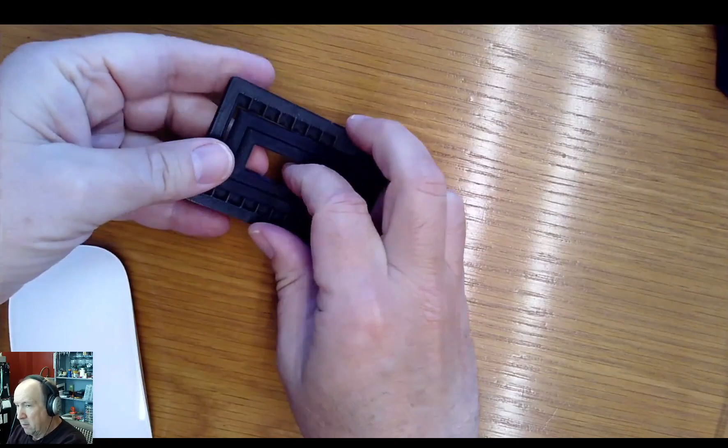This is a cell phone holder. You basically set it up like this, and then you can set your phone in. Works really well.

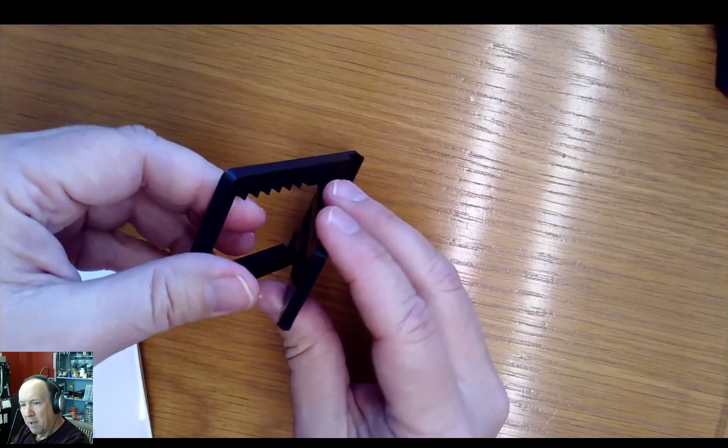Now, when I saw this, the thing that fascinated me by it was it printed in one piece. It prints just like this, but when you take it apart, off the print bed, it's got hinges. And I'm like, that could be really useful. I was fascinated by that.

Now, this came off of a website called Thingiverse. They got lots of stuff out there, I've talked about them before. So I went and looked at the files for this, and it was actually done with OpenSCAD. And what they do to make this work is they do

kind of a 45-degree pin and socket. So in here, this part has a pin that sticks out like this, and this part over here has a socket that's the same shape. But they're about 0.6 millimeters apart.

And, you know, it kind of seems to violate our rule that we can't print in midair, but it really doesn't. There's 3 parts here, and all 3 parts are flat against the build plate. We can actually print overhangs of about 45 degrees. So if I make this pin that sticks out at about a 45-degree angle and I make the socket about a 45-degree angle, that'll work.

So what I did was I sat down and worked it out, just like we did the servo. You can make modules that do this type of thing for you so you don't have to work it out all the time. And instead of you trying to figure out all that stuff, it takes a lot of prints, and since I got a printer behind me, that wasn't a big deal. But trying to get you to do that, it's a day or two between turnarounds, and that makes things too slow.

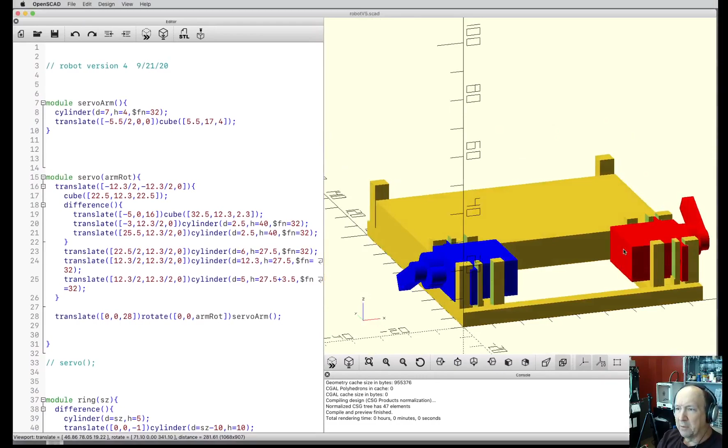I'm going to turn this off for a moment, and then I want the same thing. Let me save this as the next version. Save as. This is going to be 6. I will push these files up to the file section. Okay, so we're back to nothing.

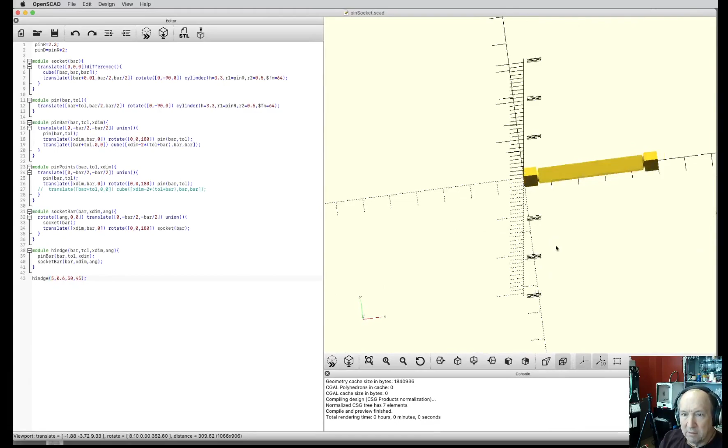Okay, fine, let's see. I want, let's see here. Okay, I want this stuff. Now, I've got this library pre-done, and it actually looks like this. But I've got a module stuck in it right now, and I don't really want that in here. Let me get rid of this. This is what it looks like. And the code is too small, so let me make that bigger.

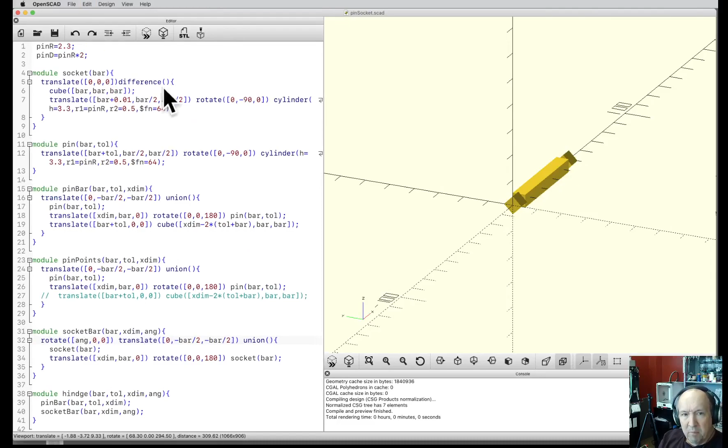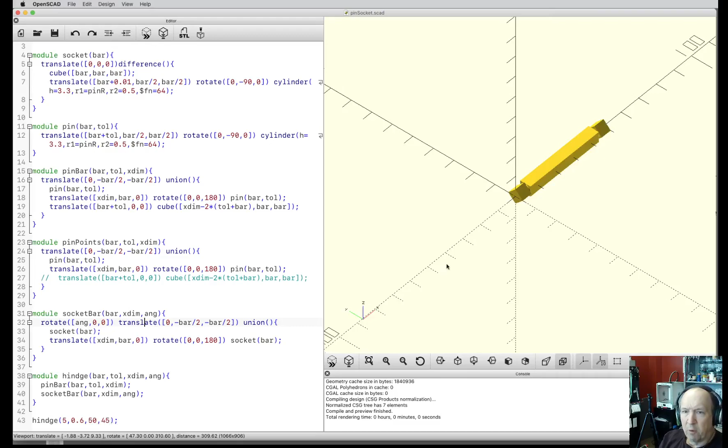So this is the design that has... you could barely see it in here. This is the pin, and then this cube over here has the socket on it. You know, I can make it easier to see. I can do a difference.

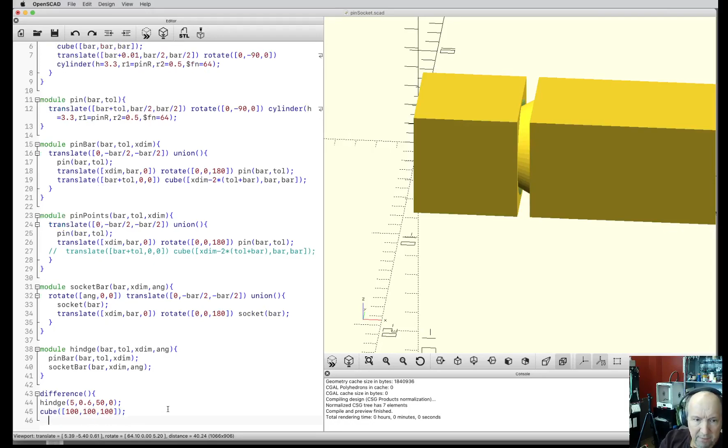Put in the hinge, and then take out a cube. I'm going to make it big, I'm just going to make it, and it'll probably just make everything go away. I need to close that difference. Nope, it did exactly what I wanted to do - it took out part of it. So I subtracted off things, so now we can see how this thing works.

In fact, if I translate it, it's centered, so if I translate it down, I should be able to get the whole thing cleared. Translate 0, 0, minus 10 is enough. I can't spell.

Commas, not decimal points. Okay.

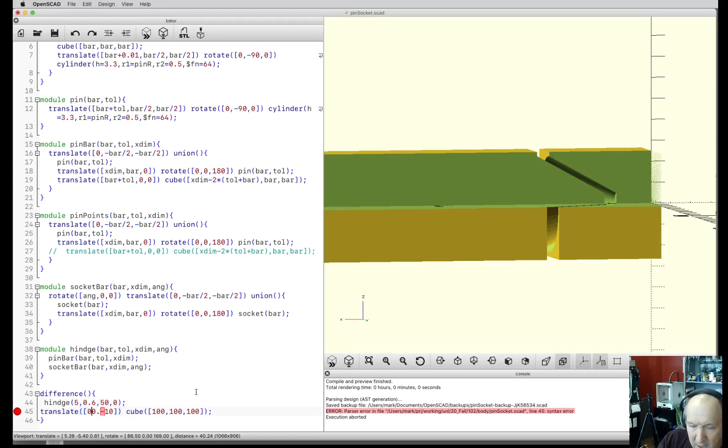Okay, so cutting away half so we can just see what's inside it. What we can see here is these parts don't really touch, which is fine. That's really what I want. But when I go to print this, I can actually make it do something that we normally don't see.

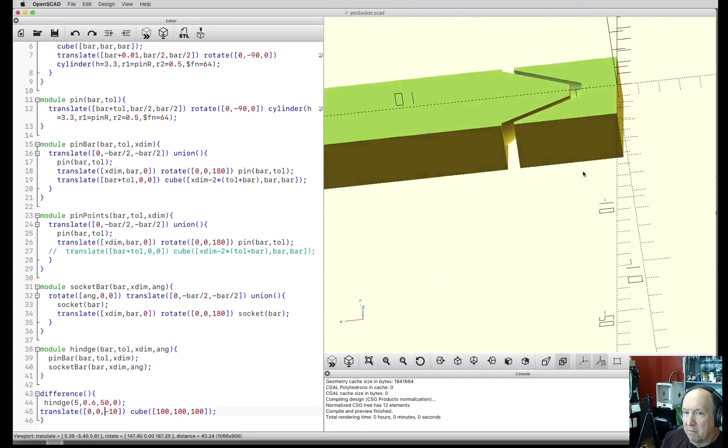So this was what's going on inside. Okay, so now I can just copy all of this code and stick it in our robot, but I've got it in the same directory, so it's called pin socket.

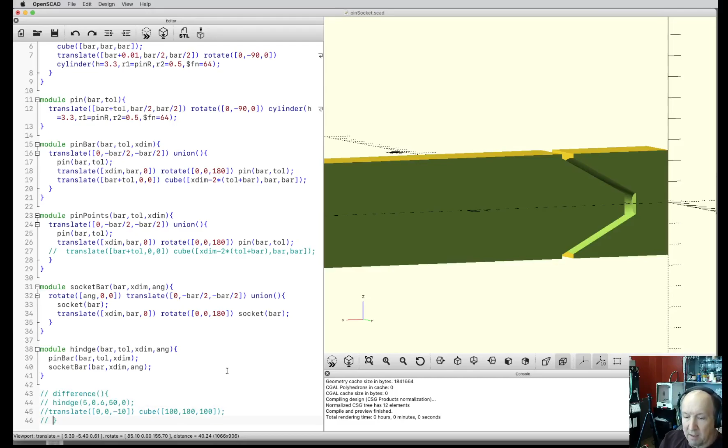So let me do something else here. Let me just comment this out, so there is nothing that's going to be drawn. There's nothing. There's a bunch of modules defined, but it doesn't actually call any of them.

So now let me save this and set this off to the side for the moment. And then clear back at the beginning of mine. Now this is version 6, and this today is the 30th.

I can say, instead of putting all the stuff from the other file in there, I can just say include, and I can tell it what file to include. This is called pin socket.

So if I do something I use a bunch, I don't have to keep copying and pasting it in, because then if I make a minor change to it or something like that, then which one's got the current version and stuff. So this pin socket routine actually just goes in for me, and it makes it much easier.

Now, I don't call anything out of that yet, but whenever the program goes through and looks at this for our robot and tries to draw something, it actually includes that entire file.

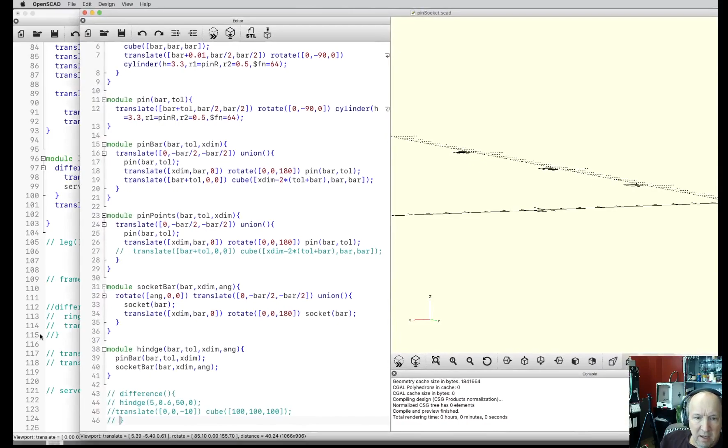So now if I go to the bottom here, I can include that thing that we did earlier, that hinge function. Remember, so I can come up here to this, and I just want this piece. I can just copy that out, go back to this is our code, and I can just drop this in here.

And now when I say draw, there it is. That just keeps our code really clean, makes it much easier to deal with.

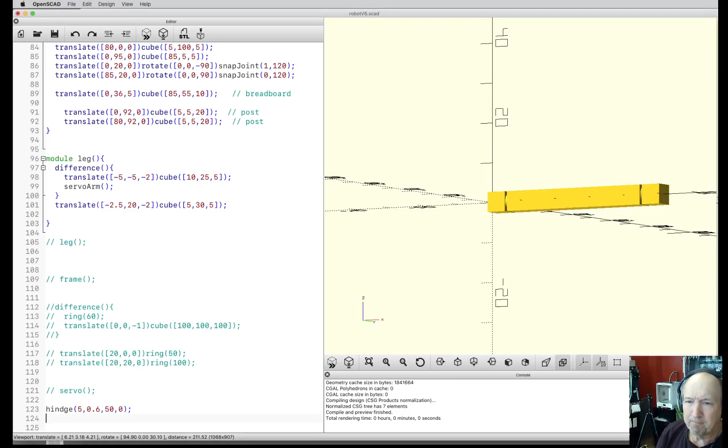Okay, so now how do I make this do something that I want? Well, getting carried away with this is really easy.

I did another project a while ago. Let me flip back to the document camera. And this never got all the way to completion, but it just gives you an example of all the bits and pieces of things that you can do.

Now, the other thing that we've got in here that we haven't really covered is the ball joints. And we'll cover those in just a moment here.

But so now when the servo moves, I can actually make an arm that is hinged that actually moves. Now, this is just to give you ideas. I'm not saying that you should copy this one, but it's just for ideas.

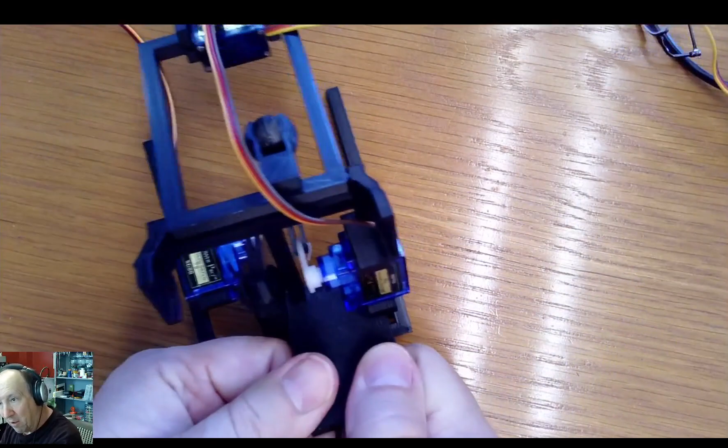And this up here actually is to hold a battery. And then this flat plate here is where I rubber band the control board to it. So it can all be self-contained. At least that was my idea.

Well, that was a year ago, and I got sidetracked onto 50,000 other projects and never got the rest of it done.

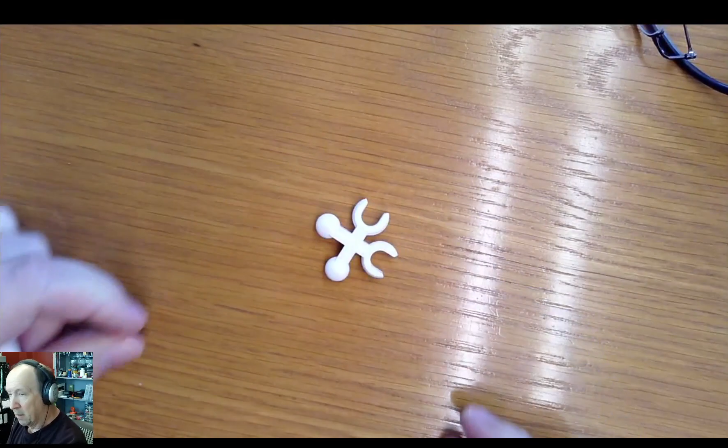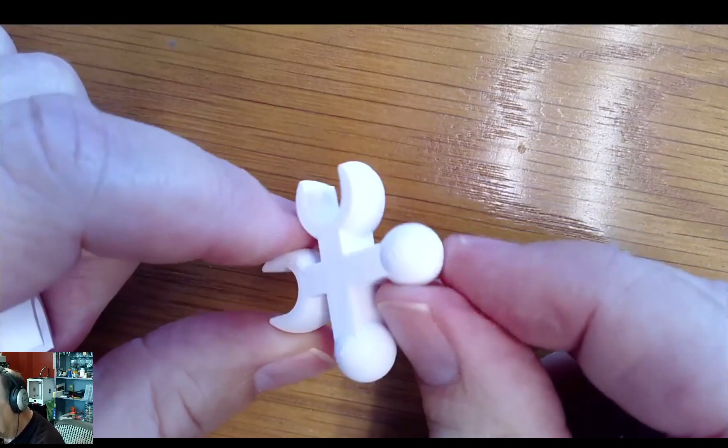Okay, a quick thing on ball joints. Same thing. If I make a ball on one side, and if I make a socket on the other, then when I print them, if there's enough flex in there, and if I get the dimensions right...

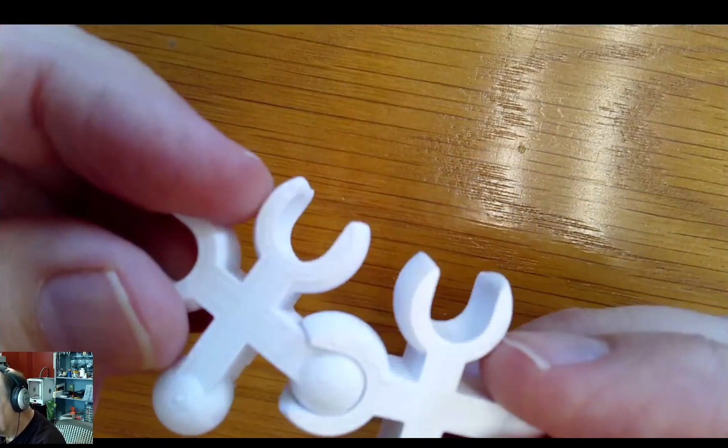...they now also flex. But they give you a lot more flexibility in direction and stuff than the hinge that we just did. So I'll include the file that can do those too, just so you can play with that.

Now this one's kind of fun. It's a 10 millimeter ball, and these can actually print assembled already, or you can snap them and unsnap them. I got carried away printing these things.

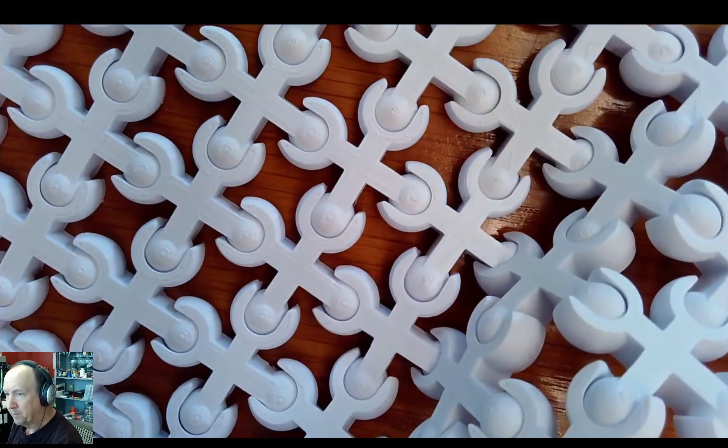Okay, but you can see that this, even though it's a very stiff, hard plastic, we can have flex out of it. It's just a bizarre thing.

So, I'll probably shoot another video on how these are put together. But we can do the same thing here. So we got the pin bars now, and we've got the other. And we'll see what we can do with this.

I'm just trying to get a few more options for you to think about when you're building stuff. Some of the groups in the past didn't use either one of the pin joints or the ball sockets. So almost anything you can make work is fair game.